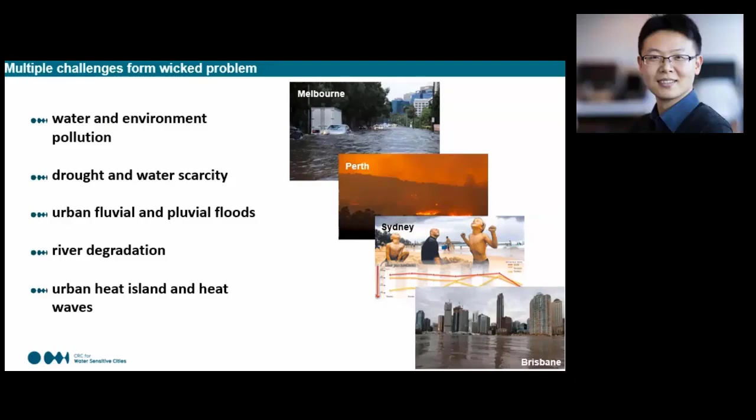Right? That's what we call wicked problems.

So fundamentally, what happens, people ask, and this is what we find from the research. If you look at the hydrological cycle of cities before urbanization, for every 100 volume of rainfall, about 85% of that is returned to the air by evapotranspiration, done by the plants, vegetation, trees, shrubs, all of them basically acting as a pump to push the water back into the air. Only 15% is retained on the land in the form of surface runoff or seepage into the soil. But once you start to urbanize and develop that land, of course in doing so you cut all the trees.

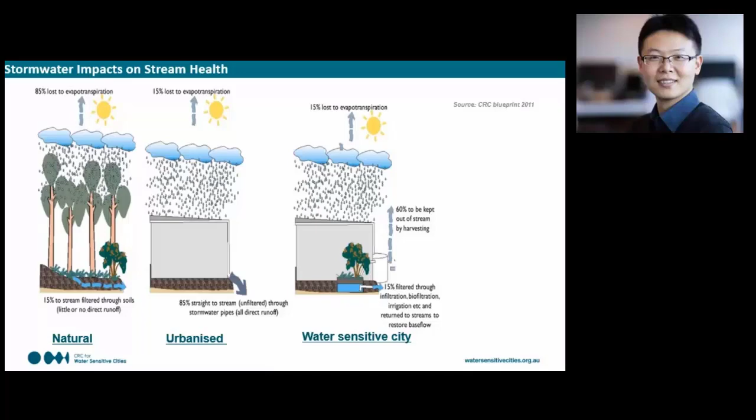What happened then is that number reversed. Only 15% is returned to the air because we lost all the vegetation and trees as the pump. Instead, we have 85% of that water retained on the land surface, primarily as surface runoff and some seepage. What happens when we try to urbanize that? We usually put in stormwater pipes, and that causes two major issues. One is the water is drained too quickly downstream, and secondly, that water washes off the urban surface and brings a lot of pollution, what we call diffuse pollution, into the downstream receiving environment.

So one of the early applications for nature-based solutions is actually trying to tackle the diffuse stormwater runoff from urban surfaces. For example, there was a lot of research about 30 years ago in Australia looking at how we use planters, sunken vegetated spaces, to treat the stormwater and clean it off.

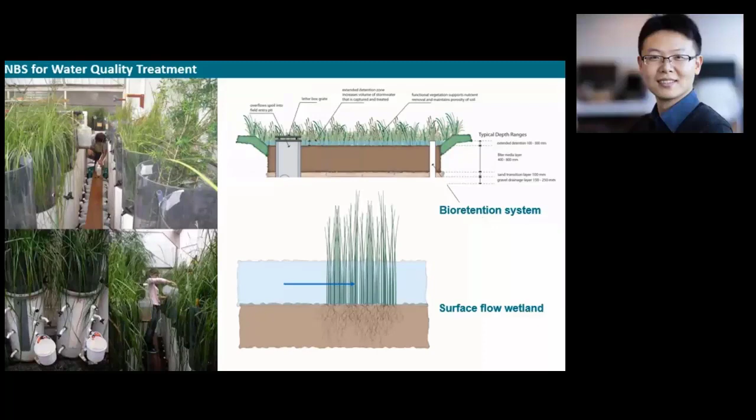The second system is called surface flow wetland. It uses horizontal flow as water passes through the plants, and the water, particles and pollutants interact with the biofilm attached to the stems of those plants. The plants are rooted in the soil, but the stems become a home for a lot of biofilm, the bacteria, to grow on the surfaces. As water moves horizontally through the densely planted area, those biofilms take up a lot of pollutants. It's the same process as a natural wetland, but in constructed form we use the same hydrology while increasing efficiency, so we can use less space, less land take, to achieve the same treatment performance. So those are the two fundamental types we use as nature-based solutions for stormwater quality management.

Then we asked, once we treat that water and it becomes clean, why should we discharge it downstream? Why not reuse that water? We looked at a lot of research and the numbers on water consumption in the city, and it actually makes sense to use that stormwater. I'll use Melbourne as an example.

In 2013, the city of Melbourne consumed 374 gigaliters of drinking water. At the same time, the city produced about 440 gigaliters of stormwater from city surfaces, and also produced 443 gigaliters of wastewater. So if you think about it, if we can use the stormwater and wastewater generated in the city, adding those two together, it will far exceed the drinking water consumption. So technically speaking, if we can use the stormwater and wastewater well, we don't have to divert water from far away, from further upstream in other places, through a long distance to supply the city. We call this concept 'city as a water supply catchment,' really trying to encourage people to think about what resources we can use within the city boundary before diverting water from elsewhere.

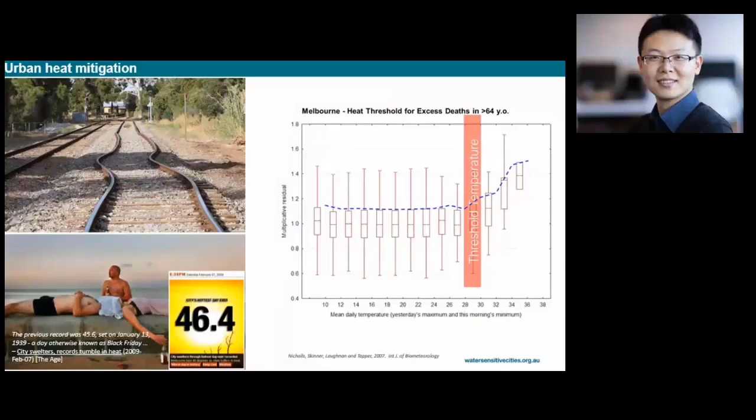How do we actually do that? There are two principles coming down from our research. The first one is we want to keep trees in the landscape. For example, we have done a lot of experiments to look at the tree canopies and the shading cast by the trees, and how that's impacting on the land surfaces.

The second lowest is actually the irrigated grass. That is quite surprising because we intuitively think that any green space will have a lower temperature than concrete surfaces, asphalt, or impervious surfaces. But it's actually not - the green space can only reduce the land surface temperature if it's well irrigated.

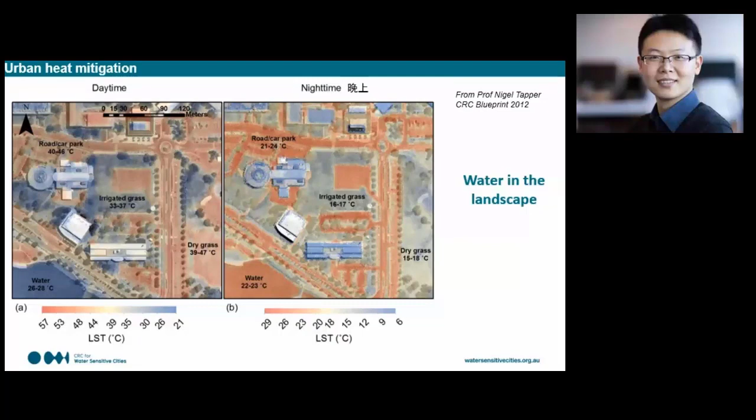That's what we call the second principle: we want to keep water in the landscape, not just about water bodies in the landscape, but also we try to irrigate and increase moisture content in those green spaces so we can bring the land surface temperature down to cool the city.

So that was a crash course on some of the fundamentals that inform us how we manage urban water in a holistic way. It all leads to this point about building multifunctional hybrid infrastructures - not only because we're trying to deal with multiple challenges, but also because we're trying to achieve land use efficiency, since different sectors like water, energy, transport, education, all compete for land in the limited space in cities. So multifunctional infrastructure can promote land use efficiency.

Just as 20 years ago, people tried to carry an MP3 player, a Walkman, a digital camera, a laptop, a notebook. But nowadays, everything just consolidates into one smartphone. And for the city, it's the same.

So what is a multifunctional infrastructure? I'll start with a very simple example. Think about an urban tree. The conventional one is trees planted in a tree pit next to the road. They are in a raised form, so the surface is actually higher than the road, and the trees there primarily serve an amenity and landscape purpose.

But if we change the way we design and implement trees on the streetscape, instead of raising them up, we sink them down, and also break the curbs so that every time it runs off the road, the stormwater runs into the tree pit to irrigate the tree before it goes through the drainage. If we make this tree a bioretention system, the water percolates down through the tree soil profile, interacts with tree roots and bacterial communities, cleans that water, and the clean water then goes through drainage as a way to manage stormwater runoff quality.

What's smart about this is that the things we see as pollutants are actually viewed as nutrients for the trees. So it's a great solution to combine all these objectives into this one updated street tree format.

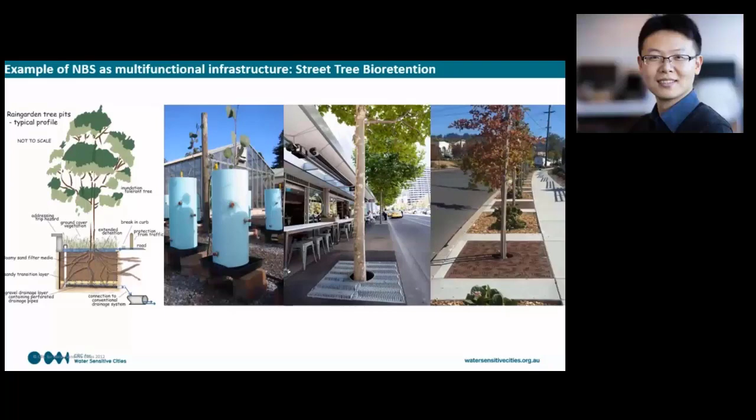If you roll this out across the city, every tree is like that, and you get multiple benefits. First, you increase the growth rate because every time it rains the tree gets a drink. Second, because the tree is well irrigated and that water carries nutrients like nitrogen and phosphorus into the soil profile, the roots become healthier, therefore the canopies become healthier and larger than normal street trees, and this also increases the lifespan of the trees.

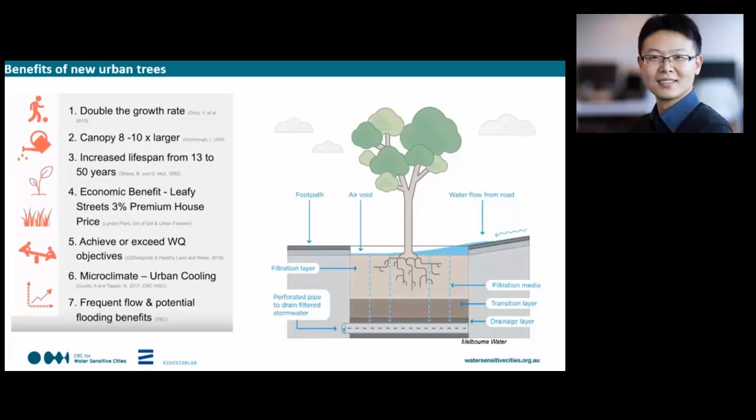If you have the whole street as a very leafy environment, that potentially increases the housing price on that street, plus we have the water quality benefit we just discussed. Most importantly, we have larger canopies and therefore larger shading, which helps manage the microclimate and cool the urban environment. And if we create a lot of these little detention systems across the city, it also helps manage frequent flooding events. So those are a number of key benefits associated with multifunctional urban infrastructure.

If you quantify those benefits into monetary terms, using Melbourne as an example, the 75,000 trees across the city of Melbourne would be valued at almost $800 million.

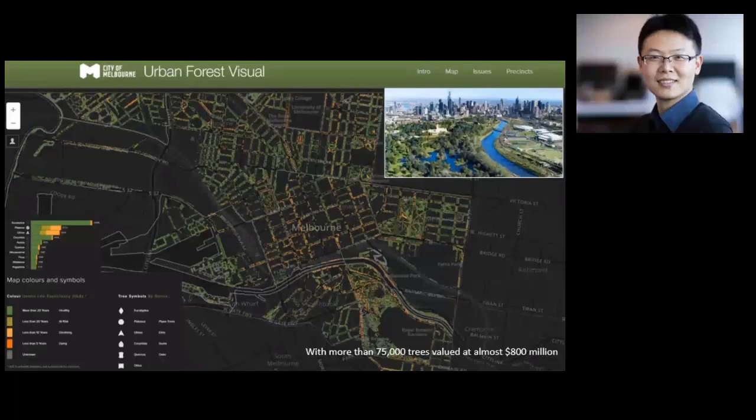The second example I'd like to give is these canals. I briefly mentioned that concretizing natural creeks was an old-time fashion, and later on a lot of professionals tried to restore the creek. Using this example in Australia, you can see the top left-hand corner is before restoration. It's concretized, with no ecological value and no water most of the time. It's clearly a single-functional infrastructure, mainly catering for drainage.

Once we restored it, you can see we created a meandering creek. At the same time, we created pools and riffles that hold the water in the creek, progressively building an in-stream as well as a riparian ecosystem, while maintaining and preserving the drainage capacity of that canal and slowly reestablishing an ecosystem.

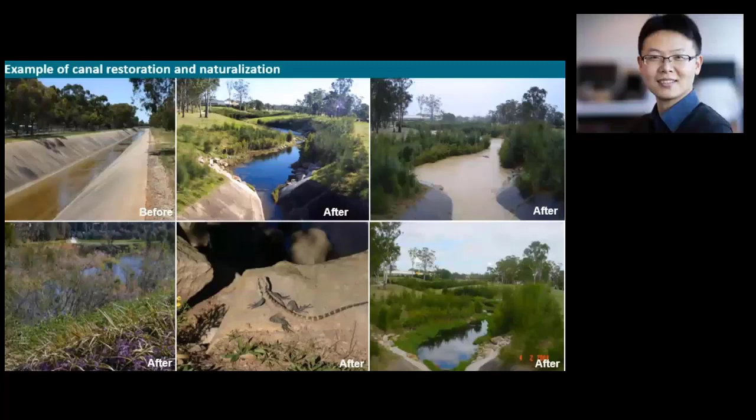You can see the before and after image, which gives a clear idea of how a multifunctional infrastructure compares with a single-functional infrastructure.

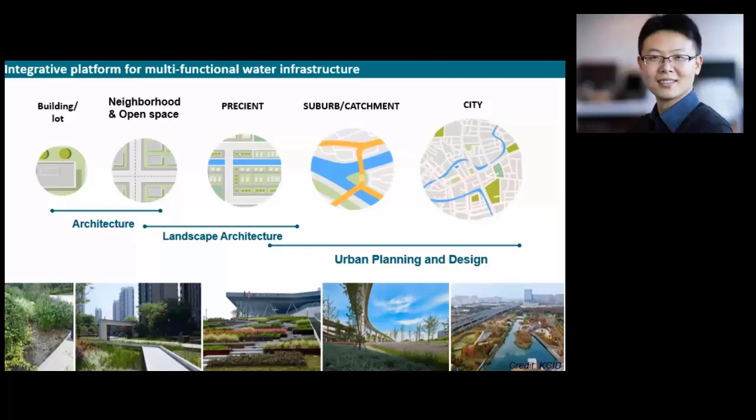So what I'm going to do next is walk you through a number of implemented projects spanning different spatial scales, all the way from building to open space to precinct and up to city scale, demonstrating how we use different integrated platforms to implement these hybrid and nature-based solutions into the urban fabric. I'll categorize those examples based on different scenarios, and the first one I'll talk about is nature-based solutions for buildings.

So this is a little laneway in the city of Melbourne, in the CBD area. I'll give you this extreme example because people always ask whether nature-based solutions can be applied in a very dense urban environment, for example in Asia. And this gives the answer.

What happens? You can see the image in the middle is basically a small biofilter planter box. It's only half a square meter large. That's connected to this downpipe, which carries a portion of roof runoff right into this biofilter, into this planter box.

What happened is that because we understand the ratio of the treatment area of nature-based solutions against the catchment area, there's a ratio, so by breaking down the catchment, we're actually breaking down the treatment areas.

Therefore, we can really make the treatment size really small and distribute it across the urban environment. So that shows you how powerful the nature-based solution is, because it's completely scalable and can be applied in a very dense urban environment.

Instead of just managing the roof runoff's quality and quantity, what it also does is that the vegetation we plant into the biofilters is actually a climber.

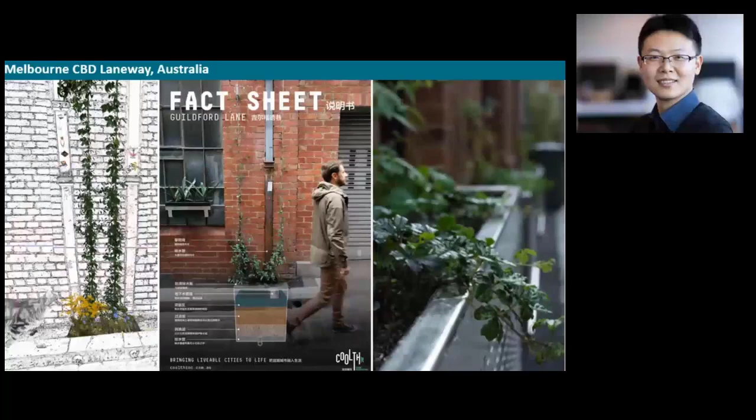They also help climb up and green up the laneways, increasing the livability of the city.

And this is the NAB building in Melbourne, Docklands. What you'll see here in the photo is actually a constructed wetland as part of the building landscape.

What happened is that this building has one siphonic drainage pipe, a downpipe coming all the way down into the sediment basin, which is the starting point of this wetland.

Then the water is moving horizontally from the screen through the wetland treatment, and then the clean water is harvested in the underground tanks.

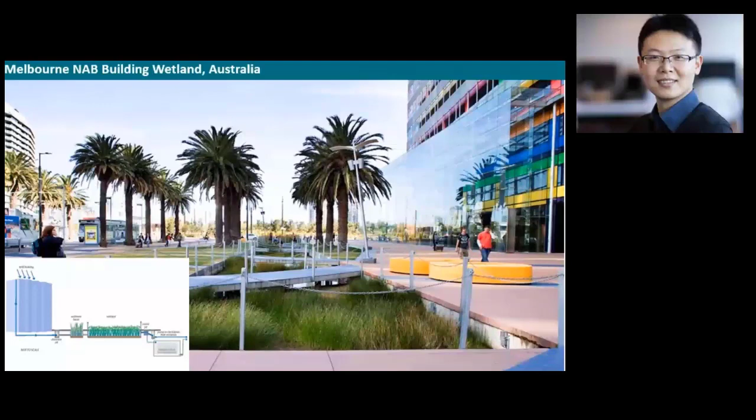Then the water can be reused for park irrigation, for landscaping, and also the general cleansing of pavement. So that's the nature-based solution for buildings.

Then we'll talk about nature-based solutions for plazas and car parks. Here's an example in one of the suburbs in Melbourne. We call it structural trees for car parks.

I think everyone has this experience: in the hot summer, you really don't want to walk into a hot car that's directly under the sun. You much prefer to park the car under a tree so you have tree shade. And why it doesn't happen all the time is because if you just plant a tree in a car park...

...the soil will actually become compacted. Therefore, the roots won't grow into a larger, healthy system. Therefore, you won't have healthy large canopies. That's because the traffic carries a lot of weight and compacts the soil.

One of the solutions is that maybe we can do a structural tree pit. What we mean is that instead of having the soil bear all the loading, we actually use some structures. As you can see, it's a modular system.

So the structure actually bears a lot of the vertical loading from the traffic on top. Therefore, if you fill all the voids with good quality planting soil, that soil will always remain well aerated because it's loose.

And if you combine that with stormwater harvesting and passive irrigation, it will also become well irrigated. Then you plant trees strategically into a few tree pits.

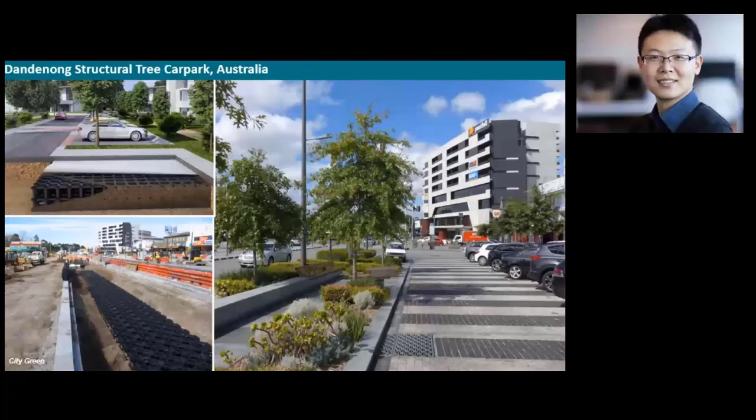During the rain, a portion of that plaza runoff actually needs to run into those wetlands first for treatment before it goes into the creek.

Everything has been done by stormwater.

At the same time, we're trying to turn that into a little botanic garden where each of the squares contains one native aquatic species.

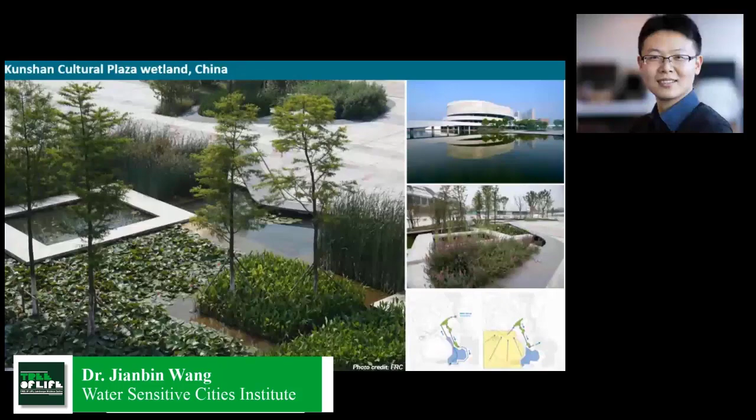And have a closer interaction with those native vegetations.

Next, I'm going to increase the scale again. We'll talk about nature-based solutions for small parks. This is one example in Melbourne, just next to the CBD area, called the Fitzroy Garden stormwater harvesting scheme.

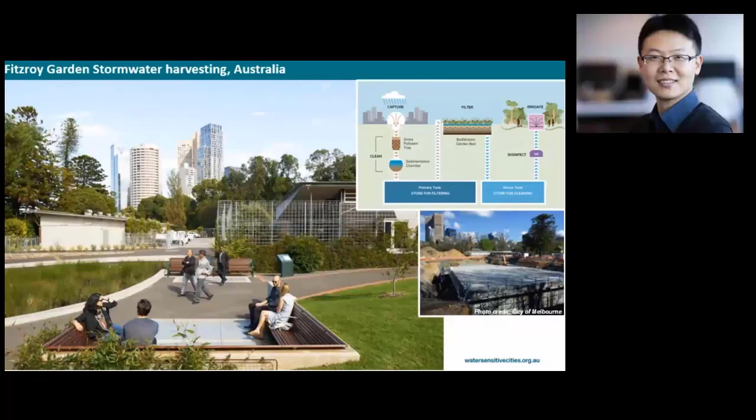So that shows you how small the system can be, and how well it can be integrated with the existing landscape.

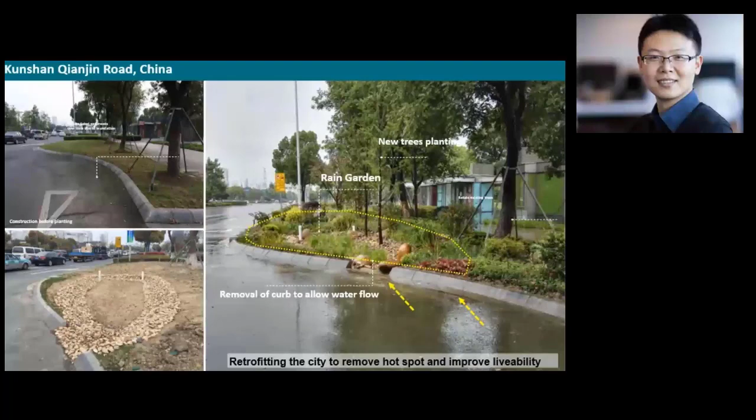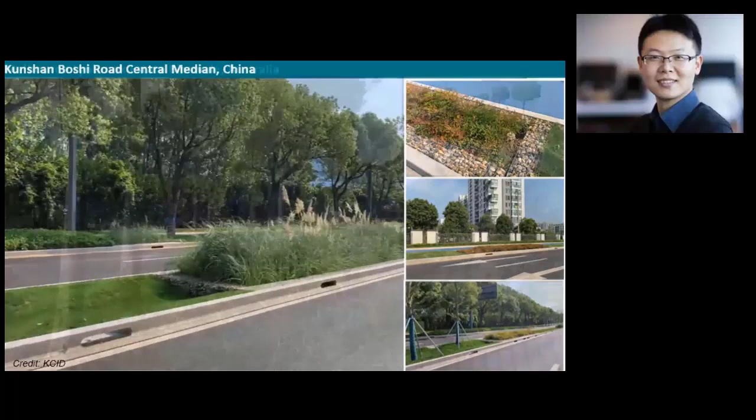During minor rain, the water runs into the center median and gets treated by these vegetated biofilters, then picked up by the downstream pipe to harvest that water for irrigation. In larger events, the whole central median becomes a drainage system, becoming flooded and carrying that flood water downstream to increase overall drainage capacity.

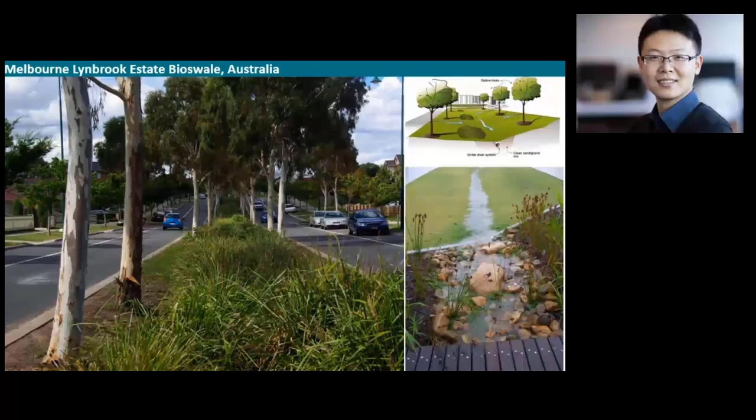Next, I'm going to talk about nature-based solutions for rural areas. This demonstrates that nature-based solutions are not just for urban environments, but can also apply to villages and rural environments as well.

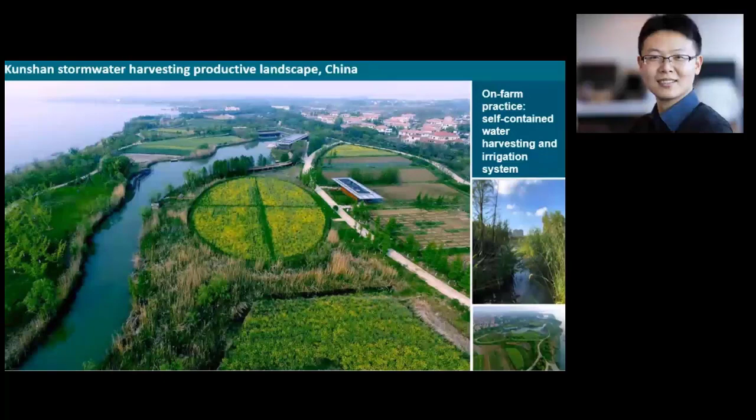The water top-up is from the adjoining lake, as you can see in this photo. Because we designed this as a well self-contained system, the operators of the farm progressively get organic certification, since there's a clear cutoff of external pollution. Everything can be contained and well managed within its own footprint.

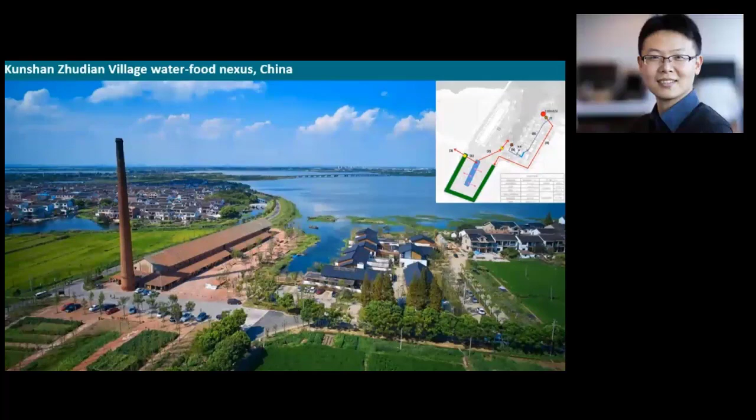Also, if you look closely at the interface between the lake, the brick factory, and the pavement, there's quite a wide wetland buffer. That's well designed to capture all the runoff from the site, treat that water, and buffer it before it goes to the lake, trying to protect the lake and the precinct water environment.

Next is nature-based solutions for multifunctional waterways, or water bodies, sorry.

What I want to show here is that different nature-based solutions can be applied together, and they can actually be stacked up, if you like. For example, you can put a lake into a retarding basin, and you can also put a wetland into the lake. They almost become a Russian nesting doll system, if you know what I mean. They achieve maximum land use efficiency because they're not mutually exclusive—through a well-designed process, they can all be integrated, sitting within each other.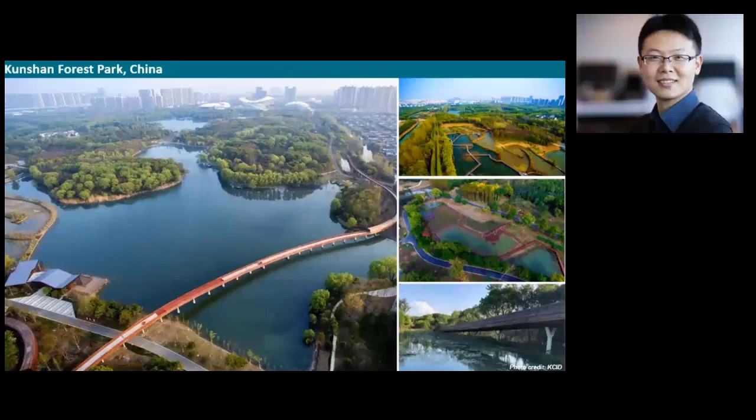Secondly, you have this constructed wetland to maintain water quality. But at the same time, a forest park can now become a wetland park as well. We then built a very detailed pedestrian movement system through the park, so that this piece of nature-based infrastructure is no longer just for water, but also for the general public—bringing people right into these spaces so they understand how they function and how they benefit the city as a whole.

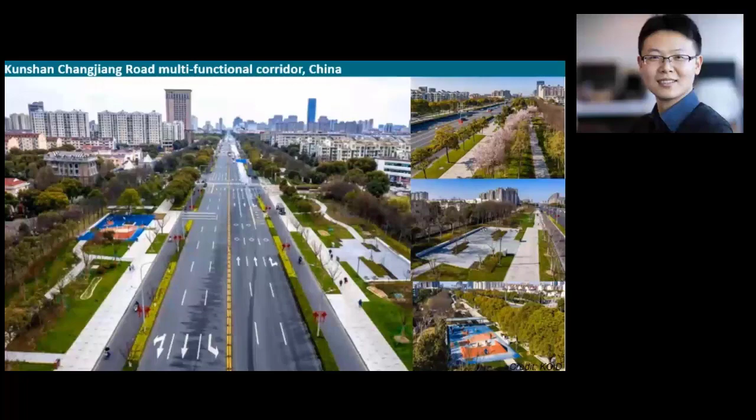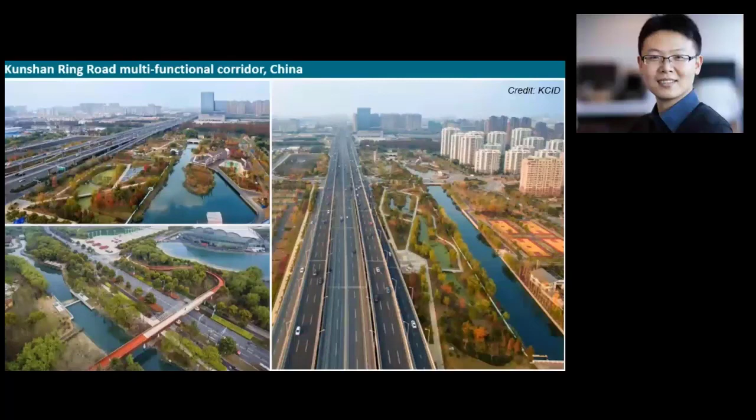So the boundaries between the green and the blue become blurred. That's what we call a multifunctional corridor, because it serves a lot of functions and brings a lot of benefits to the community, especially during the dry days. Those green and blue buffers are no longer just idle. They're actually part of the slow movement networks for people to move across the city, but also linear parklands to benefit adjoining communities.

Okay, I would like to stop here and just summarize that I've provided a lot of built examples today, and the idea is to give you confidence that multifunctional infrastructure or nature-based solutions is no longer just an idea sitting in a laboratory or in universities. It has actually been applied at multiple scales and across different cities and countries in the world.

So I would like to give you the three key principles for practice that underpin water-centric cities. The first one is the city as a water supply catchment. This really means trying to access various sources of water, not just the water that we divert from further upstream away from the city. We have to look within the city and see what we can use in the first instance.

The second principle is a city providing ecosystem services. It really means that even though urbanization breaks the natural hydrological cycle, we can still use the open space in cities to reverse that trend by providing ecosystem services. In that space, there's a lot we can do in terms of landscape architecture and urban planning to embed those functions into the city space.